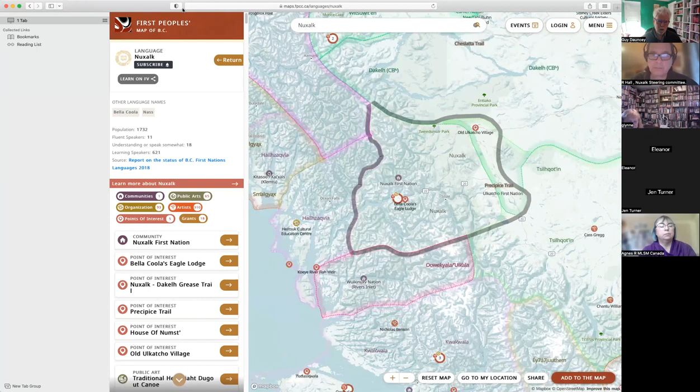So I just wanted to share that by way of my acknowledgement of the traditional territories that First Nations live on, and the journey of learning that I'm on, which is really probably the most important piece for us white settlers. We, the West Coast Climate Action Network, was established two years ago to support and engage the 240 climate action groups in British Columbia, to help them be more effective, to promote their work. And we set up an Indigenous engagement team so that we ourselves would learn and understand what was happening and be in a good position to support similar Indigenous climate action work.

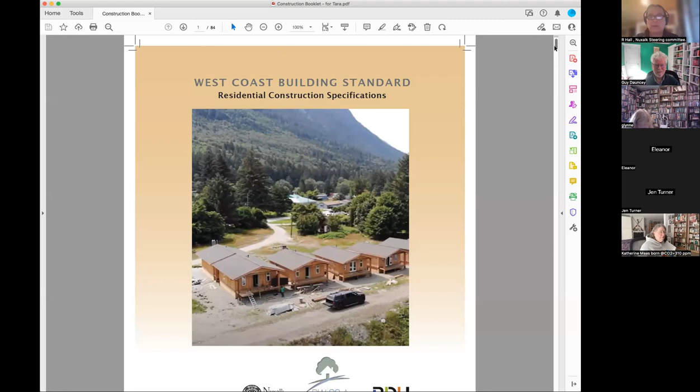So this is the West Coast Building Standard Residential Construction Specifications, meaning it has two options in this booklet. You can look at metal roofing or asphalt roofing, like I said earlier.

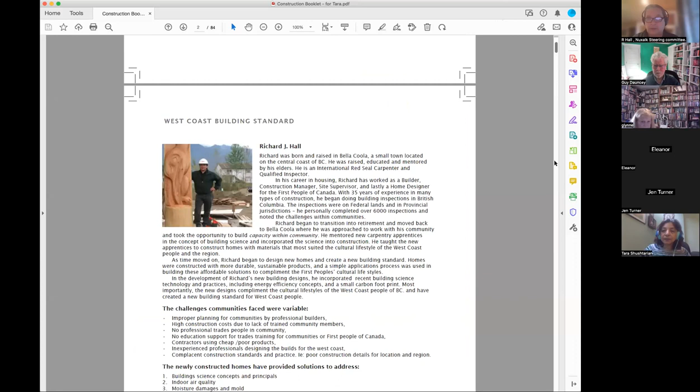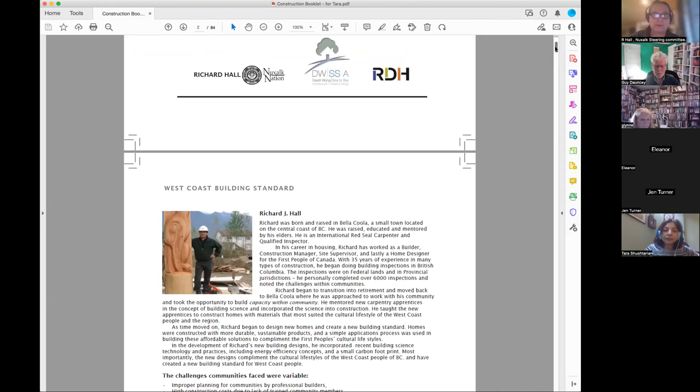If you go down a little bit on your screen — go up one more, up one more, down one more, up, back to the beginning, toward the beginning. Right there, hold it there.

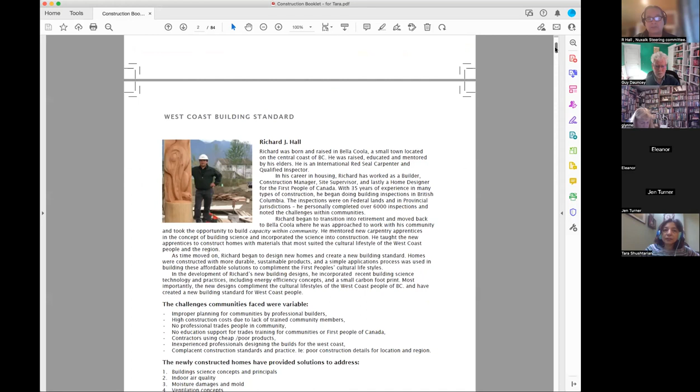So this booklet was created by me and is supported by BC Hydro, BC Housing, the province of BC, and I worked with an architect who helped me design the building, and RDH Building Science people from Vancouver Island. A little bit of history myself.

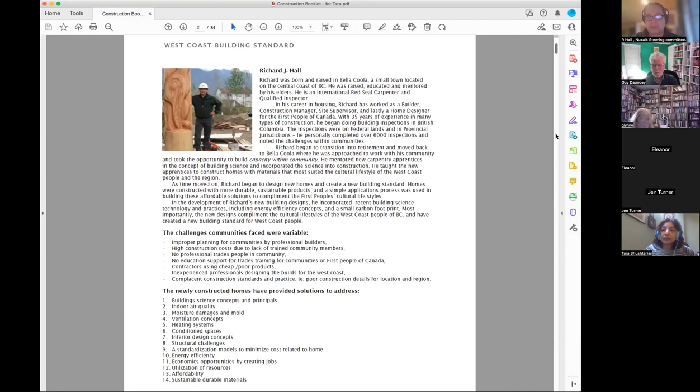The newly constructed homes — if you scroll down a little to that area — provide solutions to address indoor air quality, building science, moisture damage, mold, ventilation, heating systems, conditioned spaces, interior design concepts, and structural challenges.

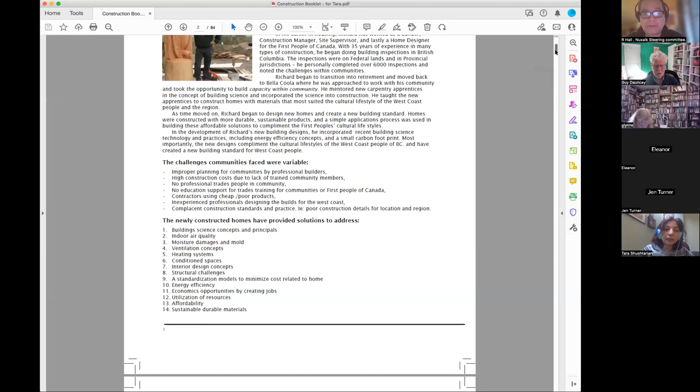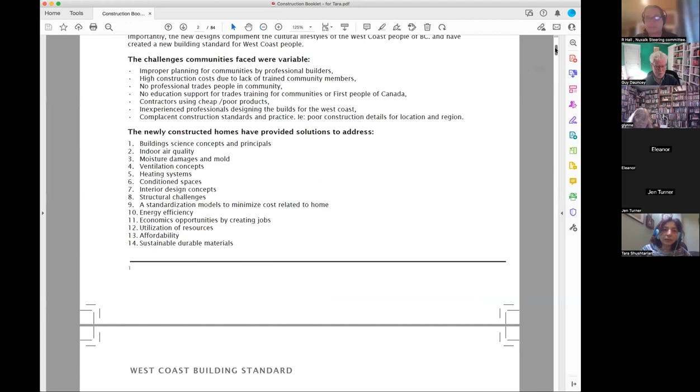As for other features found in the work we did with the booklet, BC Hydro asked me these questions — I don't know why you're scrolling down — so, the carbon footprint that evolved from the process of application and the process of selection of material proved to be lower than the Canada standards because of the wood content.

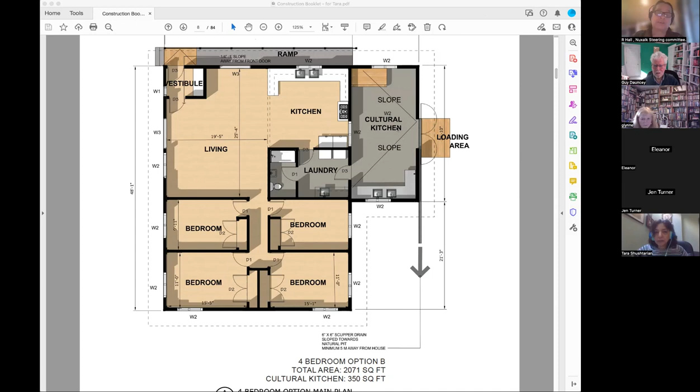But with the heating system, on all these units they have a forced air system, and it's interconnected to a heat pump. The heat pump is your air conditioning, it's also your heating system, and they're making it more efficient. But I would develop something that's most suitable for your community.

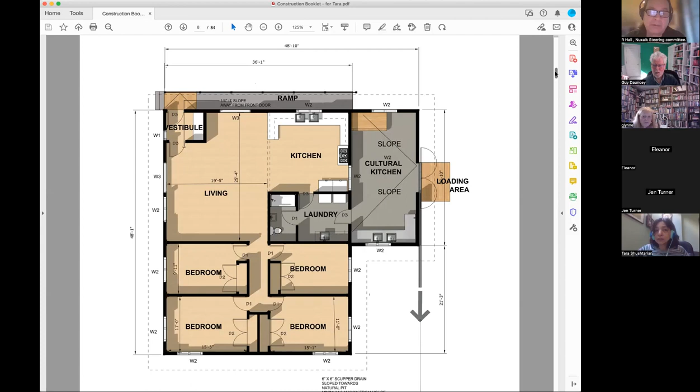A lot of people say wood stoves. I said it's too inconsistent. Why don't you think about using a pellet stove, which is more consistent on burning and more manageable for storage and everything else. So I found them pretty efficient, but it's up to you. I shy away from wood burning appliances because I saw the damage it's caused, and you still hear about it today, the fires this causes.

So we'll go to the next slide.

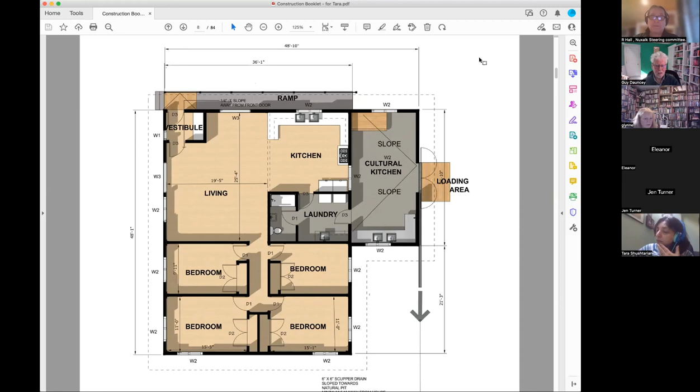This diagram shows, you'll see 3 or 4 diagrams like so. The area that's most white is your cultural space, and the pink and blue is your heating system, interconnected with the heat pump, in a conditioned crawl space, meaning the crawl space is so insulated, so well airtight, that you naturally ventilate it with your heating and air conditioning system, and it needs nothing else in there. If you introduce something else in there, it'll cause damage, and we found that out here in Bella Coola through trial and error, putting louvered screens on the outside walls, which just caused the spaces to freeze.

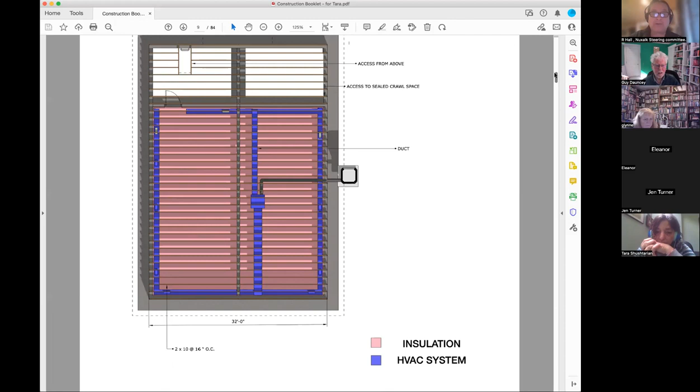And if you look at the crawl space, you see an access door, and a door access from above. If I go back 2 or 3 pictures, I'll point that out.

Okay, stop right there. So you see there where it says slope 1/4 inch to the foot from the front door, and there's a little box alongside where it says vestibule, right there. That box lifts up and opens to a staircase down to the cultural part of the kitchen. Then you can access storage in there, or have storage in the cultural kitchen, but additional storage by lifting that little box.

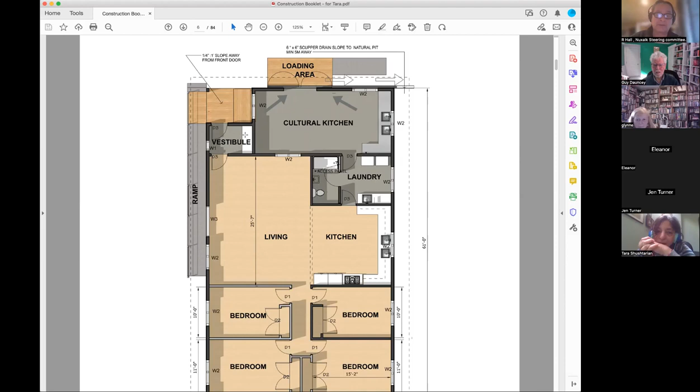You can access the crawl space. Go back to the last slide we were at. That's there, so you see that little door in the white spot, that's access to the crawl space. And there's a door that leads into the pink spot, right there, the door that leads in to maintain your furnace and your hot water tank and everything else you have down there. That's mechanical, so that space is pretty much conditioned.

Richard: Next slide, you'll see the thing — when you say furnace, do you mean the heat pump here? The heat pump's on the outside, and it's interconnected to the furnace, which is in the middle of the building. The furnace is not vented through the top — is not burning anything, it's distributing it, right? It's distributing air, but it's also burning. So a heat pump, when they started, was good to -1. Now they're getting better at it. Then the forced air system will take over.

The forced air system will take over at -10 when it gets colder. With these homes we built here in Bella Coola, the homes were costing us normally $12 to $17 a day with the heat pump and the forced air system, costing us $1 to $1.50 a day to run. And we're fossil fuels, so a tank of oil will last us almost 2 years now.

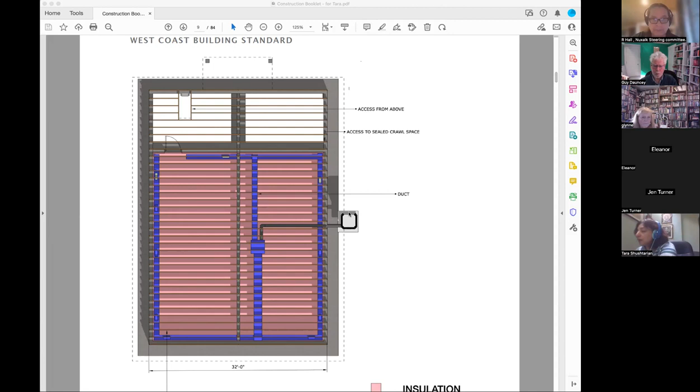Because we're off the grid here in Bella Coola, that's why I designed this system. So that's an oil furnace for backup heat then, really? That's an oil furnace, yes. But if you got gas - that's for backup heat when the heat pump needs to work harder.

We're still working on the design systems, but we find that most proficient for us in the west coast of BC here. Whatever you got that's working for you, incorporate into the building standard, and it'll work for you, it complements what you're doing. Like I said earlier, this is the west coast and has all the general ideas I noted as an inspector and incorporated into the building standards for the west coast of BC.

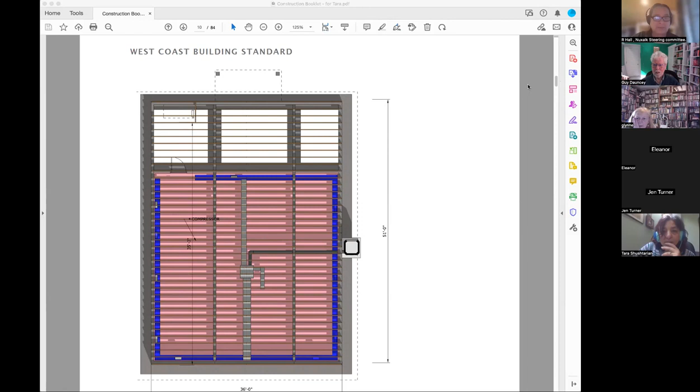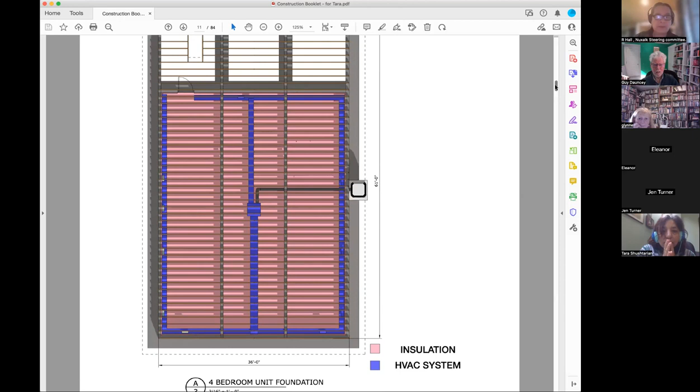And you'll see it over and over again. Then we'll go down to the interior spaces. I'll point out some of the things that - next one. These are all the intersecting roofs.

That's your elevation, and that is your standard single family dwelling. In this case, it has HardiePlank.

With a rain screen application, ramp trusses, large trusses, structural grade trusses, ventilation system on the roof, and the soffit ventilation system beneath. Now we know what this costs, $110 a square foot, by utilizing our resources, our people to build them, training them how to build them, and teaching them an application process and what they do in the buildings.

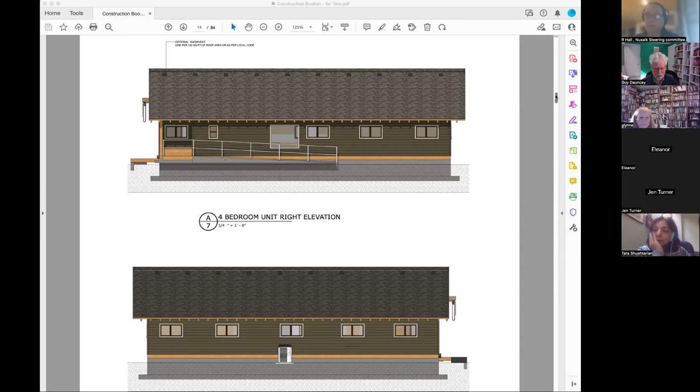Go down to the next slide. You see the windows are all one size. Oh sorry, I've got one thing here, go back up. Okay, one more. Okay, you notice there's a big window there.

As an inspector, I worked in BC, and a common question for elders was, 'Richard, I can't see outside, can you put a big window here for me to look outside?' And that's why we have a big window on this building that the elders asked for, just to sit and look outside to see what's going on. That's the only difference here, but the bathroom windows you see are smaller.

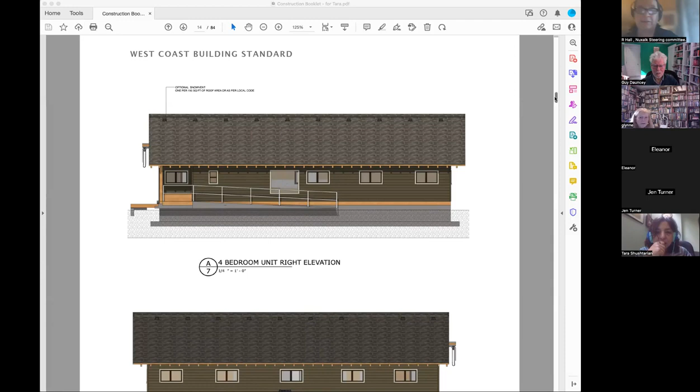Okay, you can go back down. And here's a cultural part of it. The kitchen here could be any kind of door you want - the French door, not the bifold, sliding bypass doors. Get doors most suited for your region, to create that air tightness and maintain that air tightness.

And you see that foundation design - it had 2 layers of styrofoam, and we found that it was a higher footprint. So we said, well, they utilize glass, the type of glass rock that you can use to minimize your carbon footprint. And even with the insulation application process, the selection of materials, we found that the Roxul had a high carbon reading. So we used Roxul on the perimeter only, and blown insulation in the middle of the building.

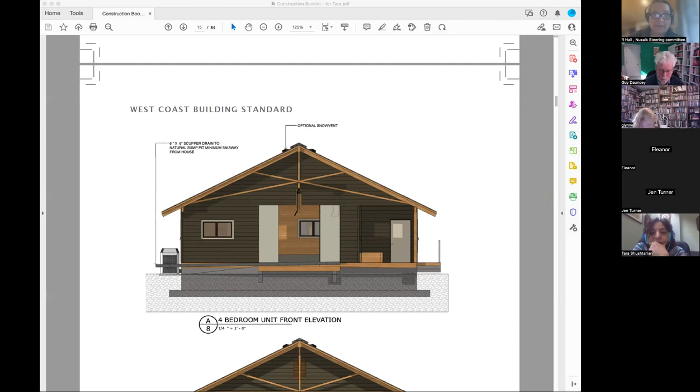Go down to the next slide, you see that - keep going until you see a side elevation right there. You see the larger overhangs noted here, the 3-foot overhang, so the wind washing and rain washing on the west coast will hit the lower 2/3 of the building.

In the west coast I found that the wind washing would be up to 100 miles per hour. With the rain screen application, meaning we're creating actual airspace between the building paper and the building substrates and the siding, so when moisture hits the siding, if it's saturated, it will drain out the bottom. You can use that space as an insulated space also in the northern regions.

So this is a concept I saw that was most effective for us to create that air tightness and yet promote the building life expectancy from 20 years or 70 years to a longer period of time. But on the wind-driven side, you have to be careful that you minimize any breaches, meaning moisture coming in, so you have to be careful doing that.

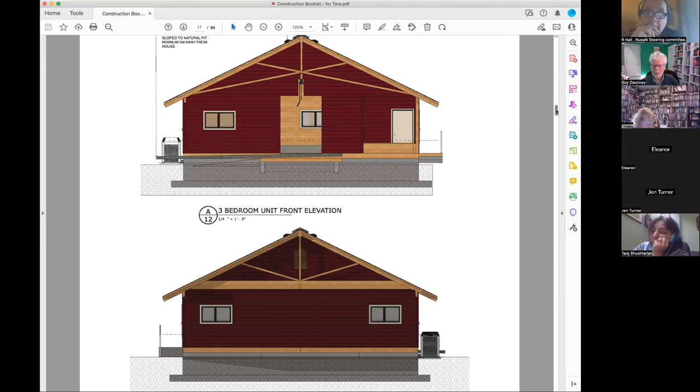Keep going. Stop at that one 3-bedroom unit. Stop, or that one's good.

That one's good. In the living space, the habitable space, there is no access to the attic. The access to the attic is outside. That's the only place you can access the attic to place your insulation, and the vents are large enough. They're larger than normal. What we found here is that the metal roofing caused so much intensity of heat that the vents were too small. So we enlarged our vents to almost 18 by 36.

And screened, louvered, they're operable, they can open and close. The application process of the insulation is designed so the first row is perpendicular or parallel with the truss to the outside wall, and the second layer is perpendicular to the first row, to a thermal rating of R52. The gable ends are insulated all the way up to the height of the insulation itself. All cavities are filled to remove any opportunities of thermal bridging.

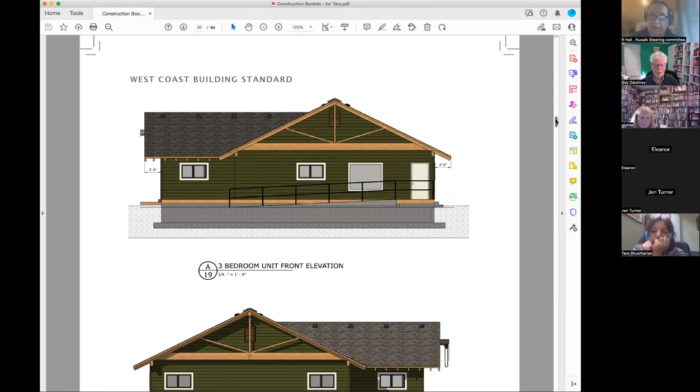Down, Guy. We don't install gutters because the snow will take them off.

You design an outside space with a drainage system and a higher slope around the perimeter of the building. I'll just answer your question there. You go down. And this feature here has a 3-bedroom unit, has a solar panel option, and we put that up there.

What we found on the top and the roof ridge line is that the wind-driven rain, if you have a ridge line there, will saturate the building space. So we created a larger ventilation space, which is about 16 to 18 inches in width, and it can host solar panels and operate the gable end vents for maintaining a conditioned space, and that's in the design.

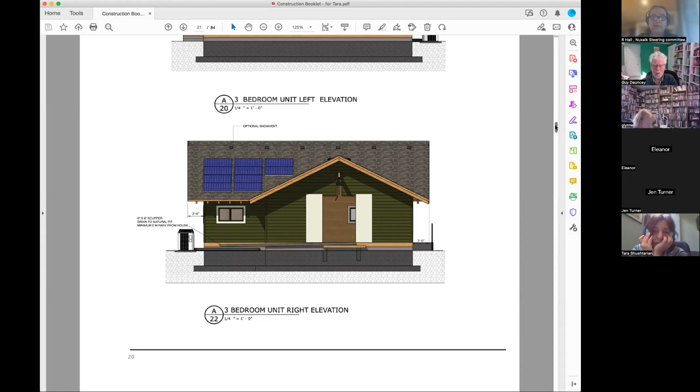Go down further. May sound complicated, but it's not. Down further. What you don't see in the drawings is, if you can imagine, the length of HardiePlank. The length of HardiePlank is 12 feet, so we utilized all the HardiePlank to its maximum performance, and we created breaks on the siding.

So by creating breaks, if kids begin to break the siding, you take those vertical stanchions off, and they could change the siding without tearing down the whole side of the building, just a sectional part of it. You don't see that on this drawing, but that's what we're doing here in Bella Coola. Kids will find that HardiePlank looks nice when it's broken, and they throw rocks at it, and well, okay, we'll put those things in there to easily maintain them.

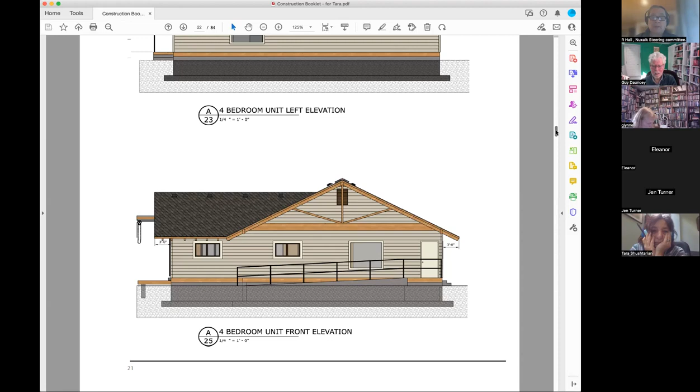Go down further. Those are basically the colors of siding. Down further.

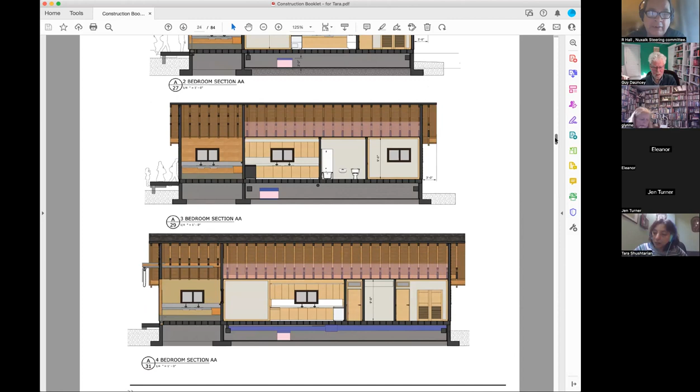It's not a basement. The crawl spaces, we use a Quad-Lock Fox Block system, and it's 4 or 5 feet high. It's an insulated wall system in the crawl space. So you can use 4 feet or 5 feet. We put 5 feet because we can get in there easily to manage and maintain the building.

And it's so warm, so warm. It's easy to maintain because that complements your habitable space above. The floors and everything are always warm.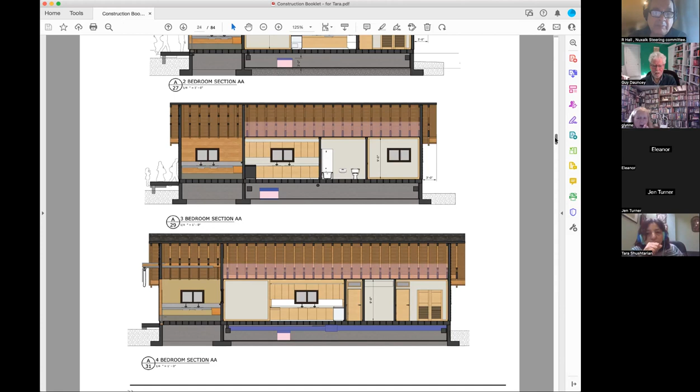So Richard, do you picture people using the crawl space for storage, or is it better left purely for insulation purposes? Yeah, they're on the left where the crawl space, you can use it as storage, down below and above. I wouldn't suggest putting too much stuff in the conditioned space, it just creates havoc. People are people, they do what they do.

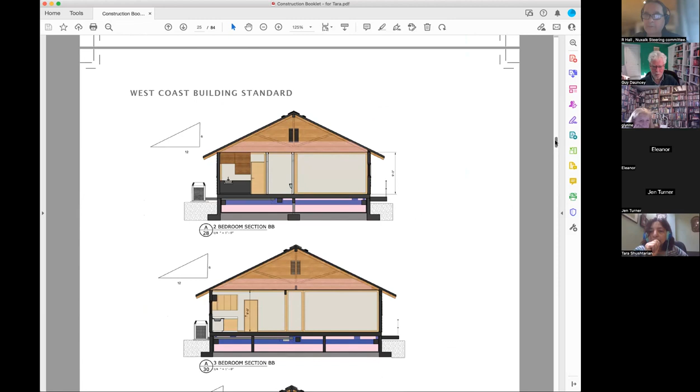There's a question: can you comment on the design, the purpose of the yurt versus the residence? I don't know what a yurt is. It's more common on southern Vancouver Island. It's not designed for this climate at all, Richard. A yurt is... well, they're used in Mongolia, in fact, where they're covered in yak furs and stuff like that. Oh, I see, but it's circular. It's a very, very cheap form of building, a single circular building, but it's not designed for your climate at all, right?

Does this building standard have Passive House certified elements utilized? No, and if you're going to go passive, I said good luck. I'm creating air tightness through vapor barriers, air barriers, and achieving the same things at a lower cost. And passive house design, I saw they're building at $700 a square foot in Vancouver. And I said, how is that affordable for First Nations? It's not. So that's one of the reasons I created this booklet.

So do you need a heat recovery ventilator as well, or is that redundant? It's redundant, it's redundant, you can put it in there. We have them in here, and we experimented with different types of heating systems and appliances, and we found that the most affordable was this model.

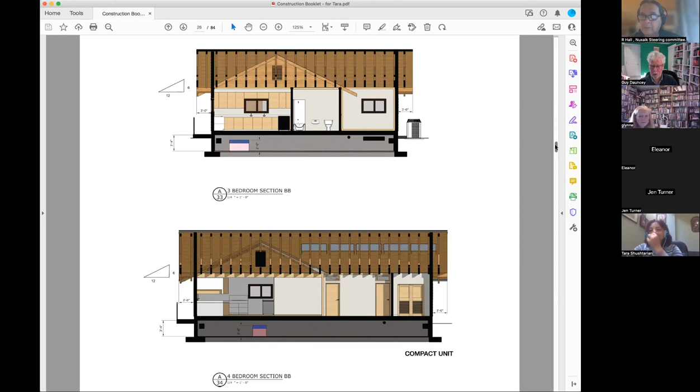Natural airflow and educating and training. So we don't live in the city where we have a lot of job opportunities and that. So, in Victoria, the typical building cost is around $250 a square foot, and I think it's similar for passive house, but yours at $110 a square foot is just fantastic.

Yeah, that's what we built: 3 bedrooms at $110 a square foot, and that's paying with our guys. Bringing the carpentry program here and training the guys to do buildings properly, where we can minimize costs and utilize resources, cost savings was a challenge.

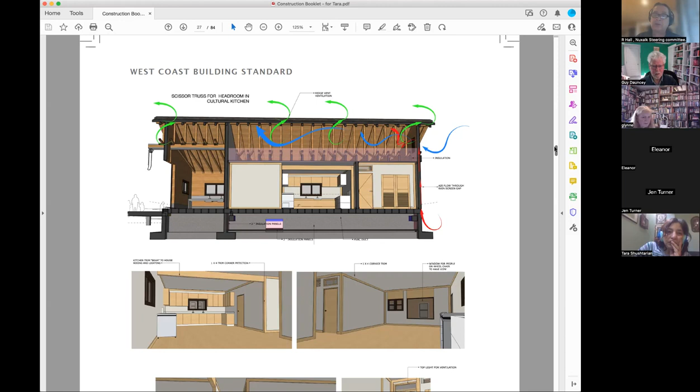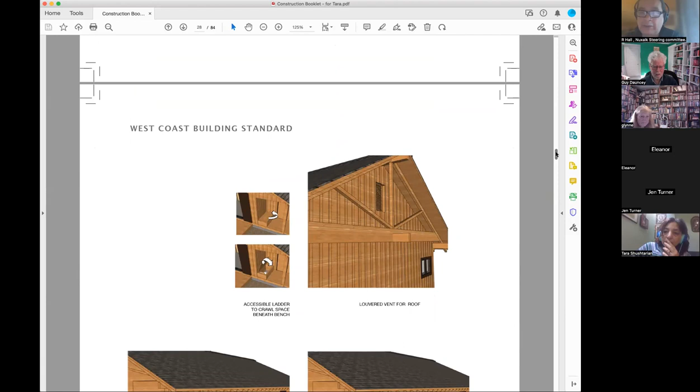And we learned that if we assign an apprentice a job description or a task to do, he'll do that consistently till he's fully mastered it, then we'll get somebody else to do it, and he'll train somebody else to do it. So they all have a role and responsibility to the building of the house. That's where your cost savings were. The house will go up in 2 or 3 days, and then they start waiting for the electrician and the plumber.

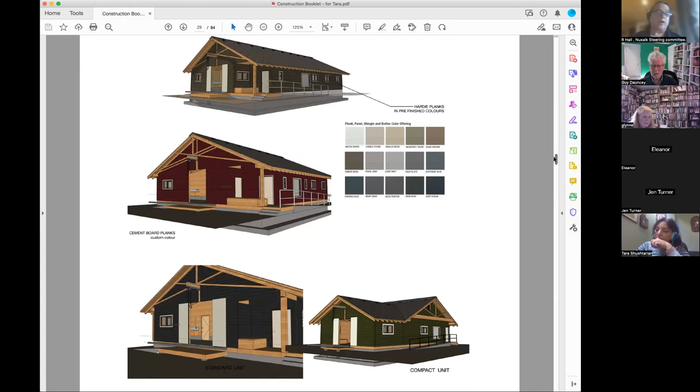And are you paying industry wages to your carpenters and people? Their wages, we started at minimum wage, and we went up. I think we're up to $30-something an hour now. But most of the guys that finished the program are up to $30-40 because they started their own company.

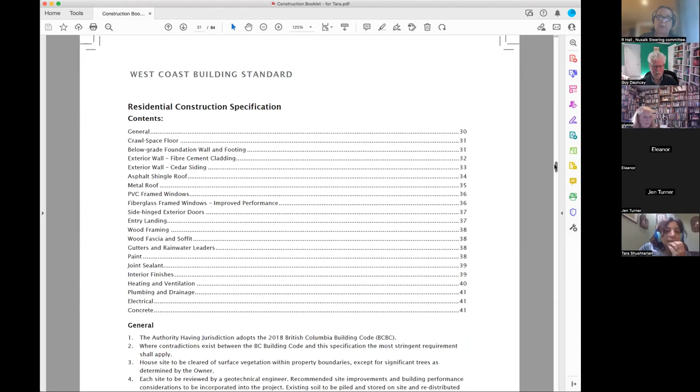Some of them have moved on, we found that the guys that we had, they found they had more to give. So some of the guys became electricians, cabinetry, some became plumbers.

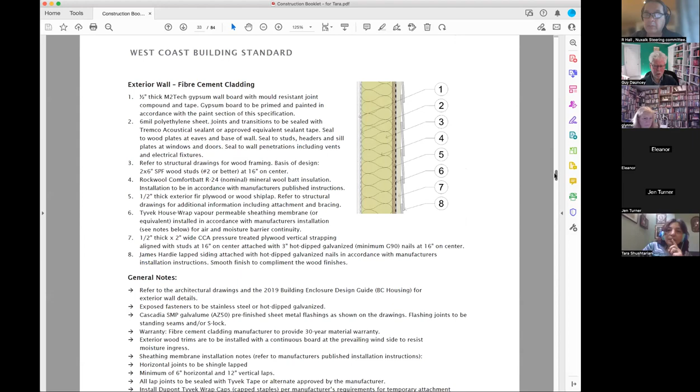So all the details here of the actual every component of the building, the cedar sidings, it's all here, right? Yeah, those are the different types of designs, applications, like a shingle roof and metal roof application. So the details are critical in that you follow the details to minimize any breach.

And when you think about building, you think plus, plumb, level, uniform, square. When you think about building science, think 4Ds: drainage, drying, deflection, durability, and incorporate those into your building standard. If you don't, you're not going to get the end result that you want to have, you're going to get something that's a little bit different, I guess.

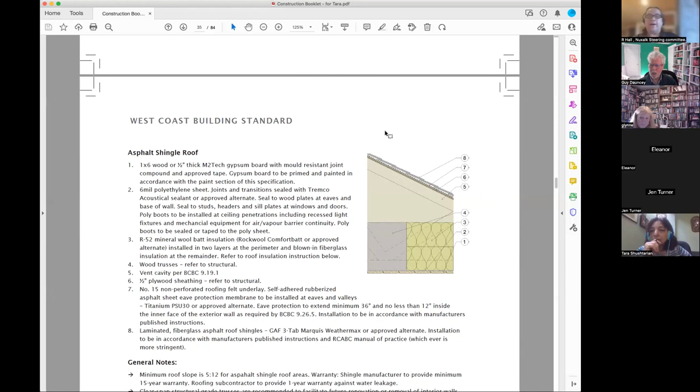So Richard, Monica Louie is asking whether you need to have multiple buildings built to get down to $100, $110 a square foot, or is that a one-off building? You get benefits, there's multiple buildings that formed that way by our guys. Once we give them assignments and job descriptions to do, I said, this is your task.

"Get the material, this is your task. Get the layouts done and start putting them together." Each had responsibility, and they got done really quickly. They actually got bored - they wanted to do more and more.

So they brought the carpentry program here, and we didn't have a good success rate setting them out - we had a 10% success rate. Overall we had a 90% success rate, where the guys here not only achieved their red seal, but they moved into electrical and into plumbing. So they got carpentry and both, and they moved - some got first year, second year, third year, fourth year. So we helped them with this program.

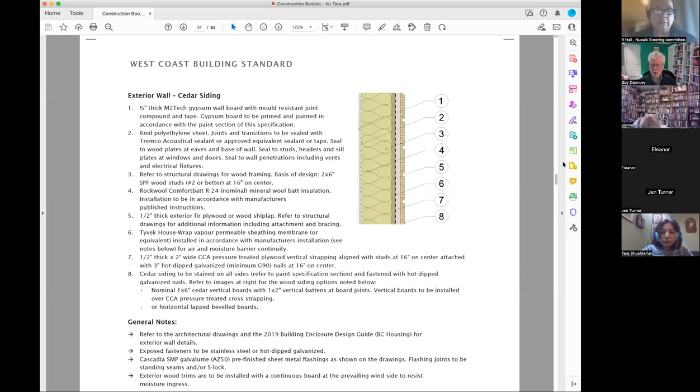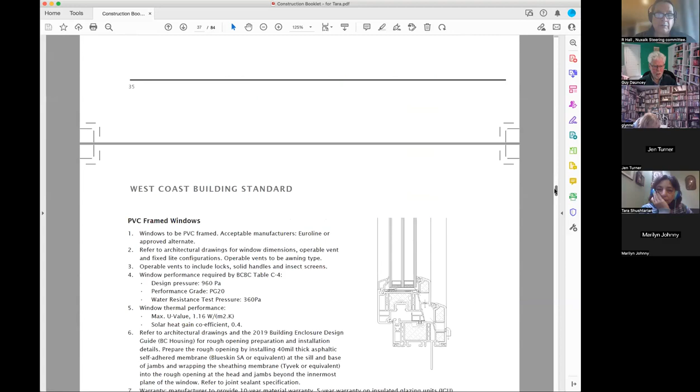I want to go back to the booklet, to the interior design part. There's a couple of things I want to point out and highlight to the ones online. Go down to the interior finishes part - that's the technical part of the booklet: metal roof, windows, the roof and windows section.

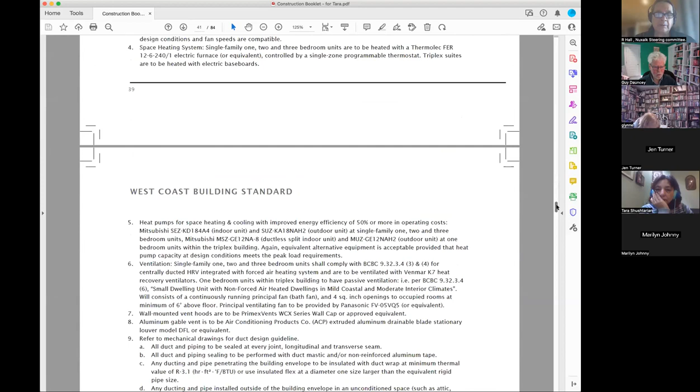Go to the interior design part. Interior, wood framing, interior finishes, sealants, finishes, heating, ventilation, plumbing and drainage, electrical, concrete, building enclosure - that's the building science part of it.

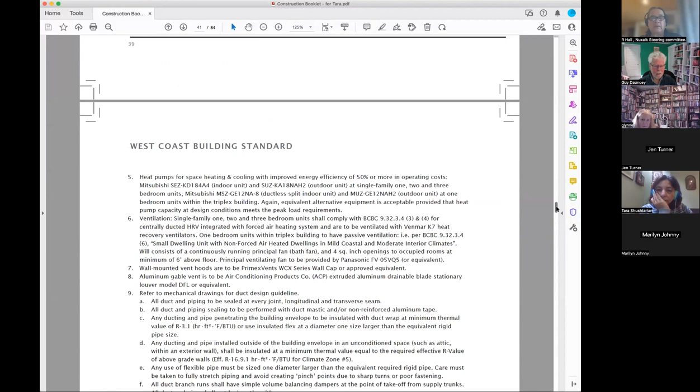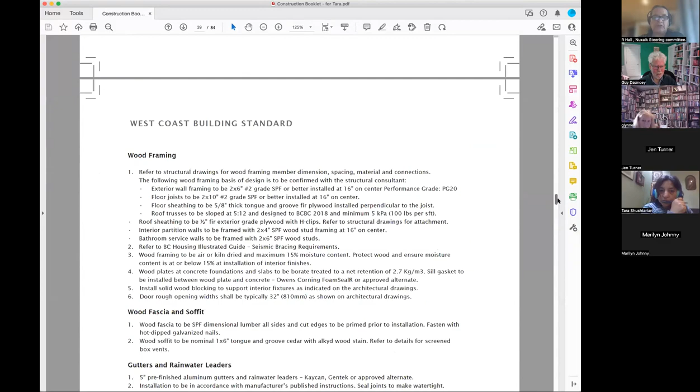Right, that's the building science part there. Go up to where you saw the heat pumps, and the interior elevations. There's a heating and ventilation standards section here. Further up, way up. Okay, here's that one picture there - wood framing, entry landing, go up, windows, roof - I lost the picture.

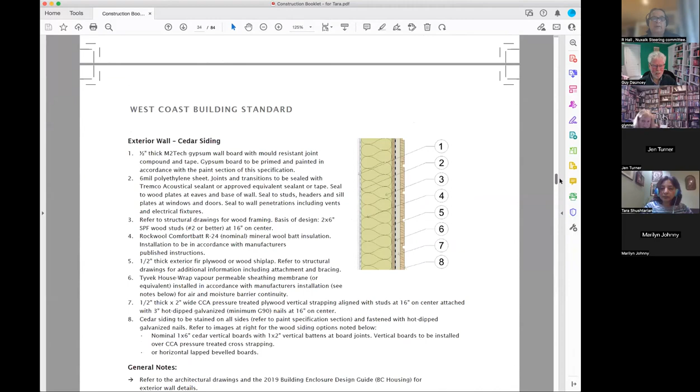I didn't see a picture, I was scrolling past it. We got the grills, and we're into the earlier designs. That's the types of doors, go to the types of doors.

See the door here - this is a transom light door, and it's wheelchair accessible. There's your exterior doors, your interior closet doors. They have louvers in there, but the transom light door creates natural airflow ventilation throughout the home. The door itself is undercut about 1 inch on the bottom, which also helps with that passive airflow.

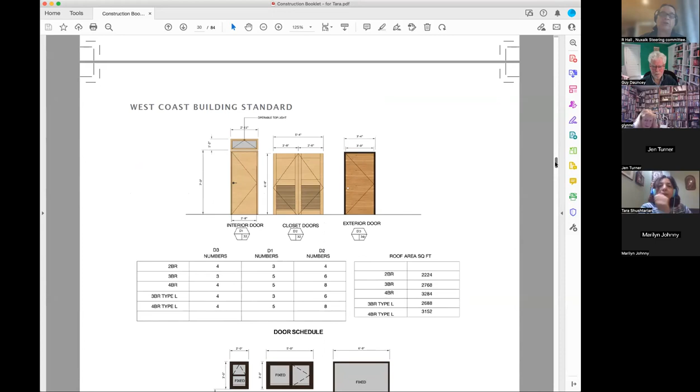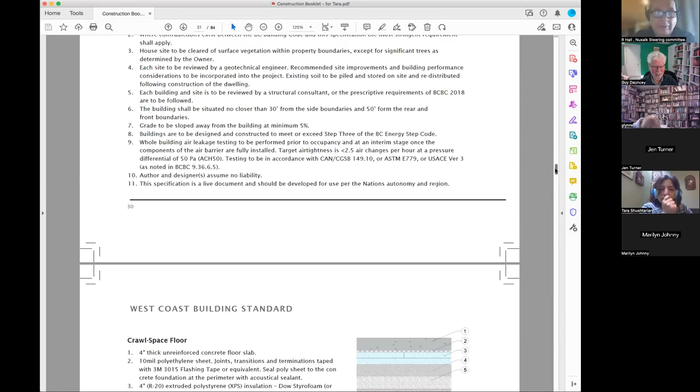Now go up to the interior finishes. I think you went by it - interior finishes, page 39. I need control of that. Let me get down to page 39... excuse me, people watching all this. Here we are, the interior finishes.

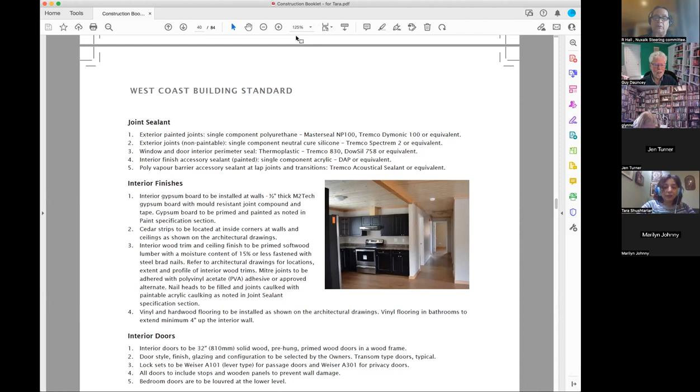The post and beam features and everything else, LED lighting, beautiful. Even the corner details - if you look at the different finishes in the booklet, it'll show you corner details to protect the walls, pieces we incorporated to protect the walls from puncture where the door swings open. All those little things I saw as an inspector, like doorknobs pounding holes through the doors, are addressed in this booklet. All these little things that cost money.

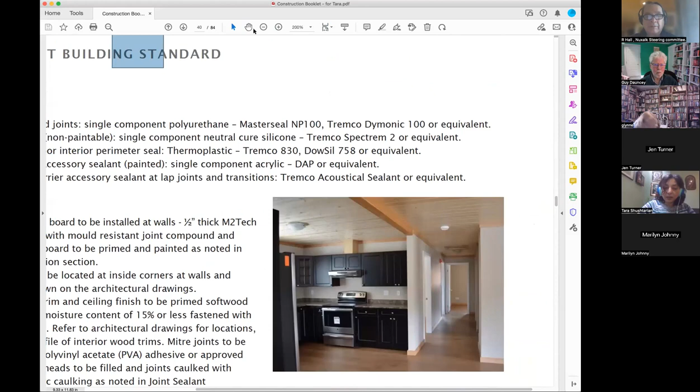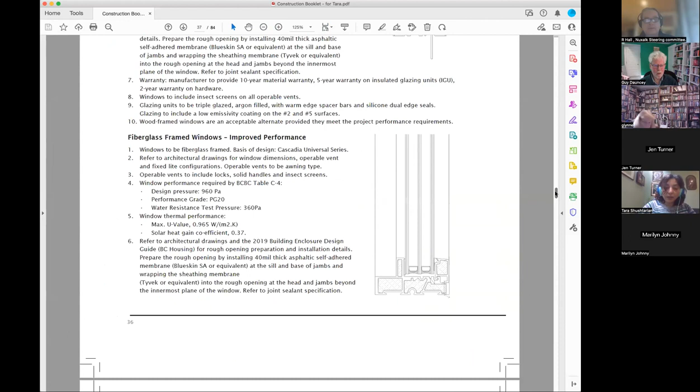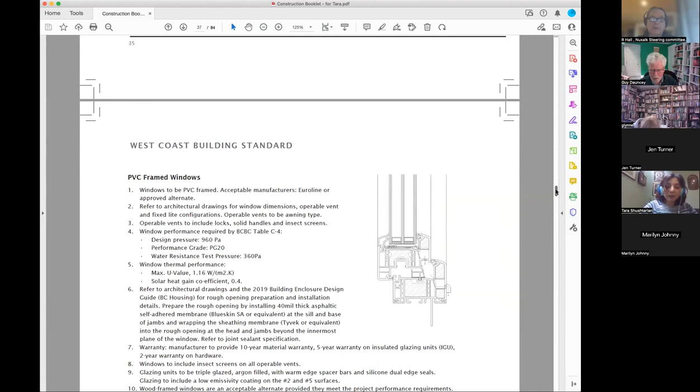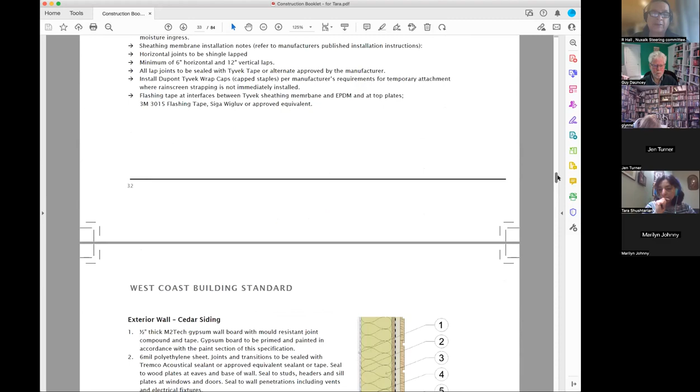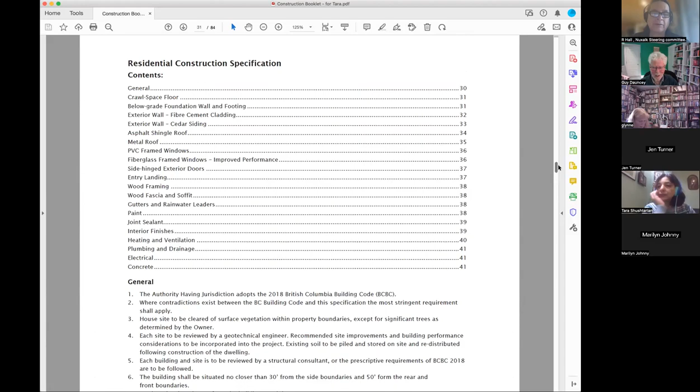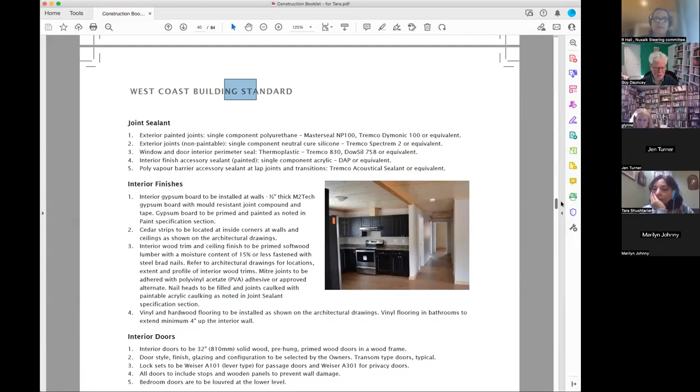Roof, exterior, you see the interior finishes, elevations, further - space for interior finishes. What page is that? Page 39. You want me going down? Not to go down, right? Just go up further. Well, this was interior finishes. Go further up, go up further. Listen to me, go up. I'm doing my best here. Which of these pages do you want me to go to? Go up.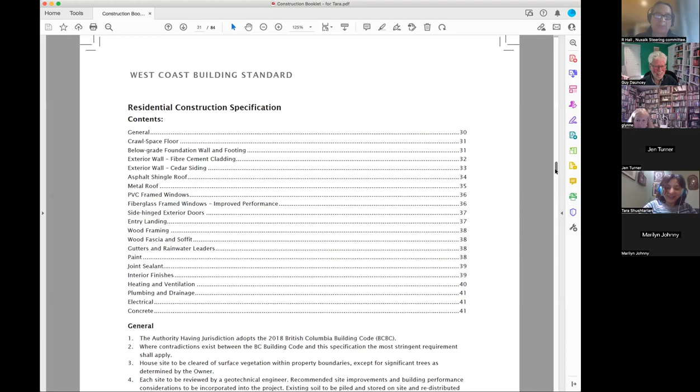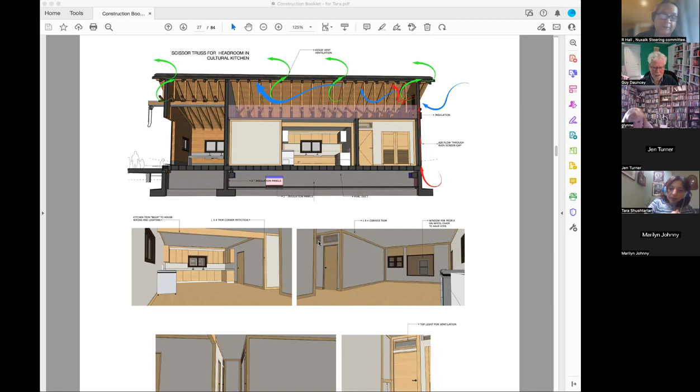Go to the next picture down below, you'll see the transom light door right there, and you'll see that piece of wood there - that'll stop the doorknob from going into the wall. When you've got these wood trim features around, that's on the... these are affordable homes with interior trim details.

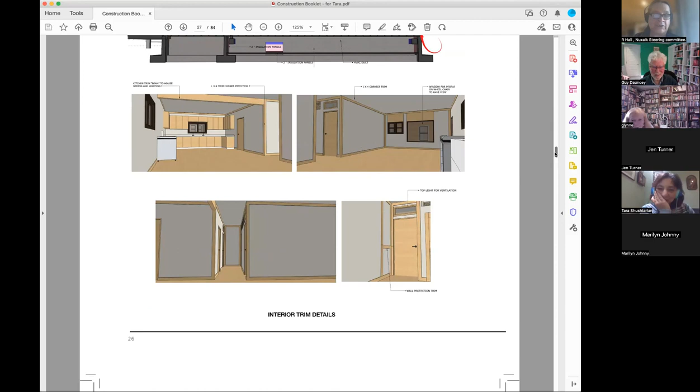And the ventilation process - so, Richard, with the materials you have to ship up to the territory, is that a cost? You know, a lot of these are imported - the Hardie board, for instance, you're not manufacturing it locally, right?

No, but we tried profiling cedar siding, and found it had such a large learning curve that it was costing me money. So I went back to HardiePlank. Back in 2014, the packages for materials - for all materials including the cabinets shipped on site - were about $50,000 to $60,000. Now there's a 400% markup in the industry.

So we said, well, let's utilize what resources we can. We went back to making board and batten siding and wood trim, utilizing all the wood we can to maximize our cost and our designs. We figured that if we incorporate building with beams and posts and beams, the cost alone would be $70,000 that we're saving. We have a mill, we have a kiln, and we're getting it where we want to be. It's just a matter of securing the funding to build and securing partnerships to utilize our logging company to build at a lower cost.